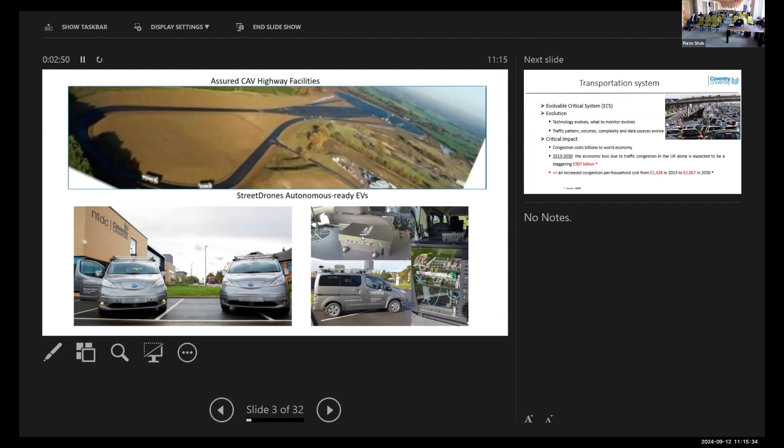We have also two street-drone Nissan autonomous electric vehicles equipped with communication capability through Cohda wireless OBU with a range of LiDAR, radar, and also 360-degree camera. So we can see the whole environment, and we can also communicate between the two cars to coordinate different maneuvers on the road. These are the main equipment and facilities we are using in our research.

Obviously, when we talk about transportation systems or mobility systems, we usually refer to this system as an evolvable critical system. Evolvable because the technology we use to monitor traffic and to measure the traffic flow evolves continuously. The technology we had 10 years ago is completely different than the technology we are currently using on roads, like the various types of sensors, and also the cars now can provide certain input that could help the traffic authority to better control traffic and mitigate the creation of bottlenecks.

Also, it is critical due to the critical impact of traffic congestion on the economy, on the environment, and on the individuals as well. According to INRIX, the cost that every household will pay in 2030 is corresponding to almost £2,000 per year, which is an increase by almost 45% compared to the cost of congestion in 2013, which means that it is a significant negative impact that we need to try to reduce or avoid.

Here I will share with you an example of the traffic vision of Transport for Greater Manchester. According to the statistics they collected, they expect that the region of Greater Manchester will witness significant economic growth. Therefore, it will become an attractive destination for many people looking for better opportunities. And this will translate in 2035 to around 1,600,000 additional trips per day, which will be using the road infrastructure, which is already deteriorated.

So let's start by talking about the autonomous vehicle, which is the cornerstone of this concept of mobility as a service. So simply, an autonomous vehicle is a car equipped with a myriad of radars, lidars, cameras and other types of sensors. It is able to localize itself, sense the environment, either directly using these radars or through some information shared with other road users. Then it will build a perception through internal sensors and also through fusing the information they gather from the environment. Then it will take action, which will be translated into movement. So this, as it looks here, looks like an ideal car that could have significant positive impact on the road.

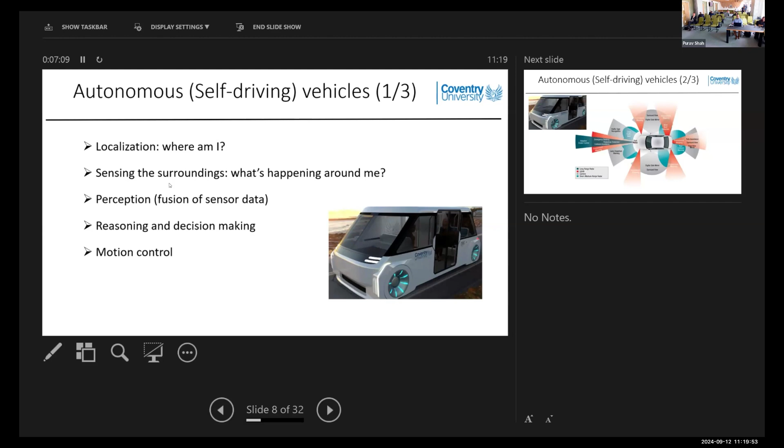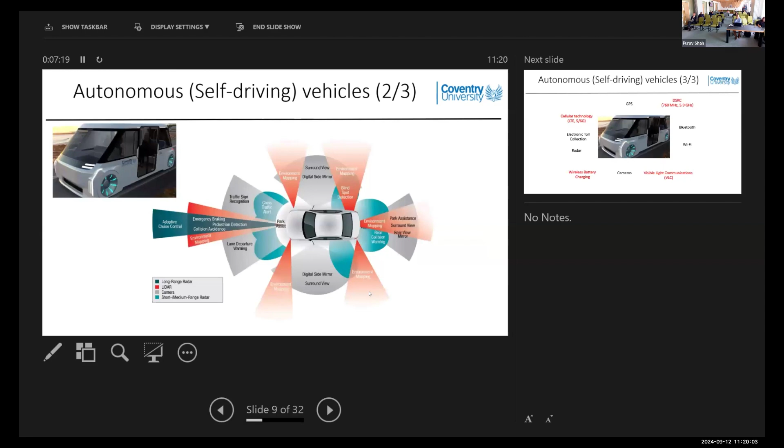Obviously, we have here a number of radars and lidars, etc. Each of them is dedicated to a specific feature that will support this car. We have also different communication technologies. As Simon has already mentioned, we have DSRC, we have cellular V2X, we have visible light communication, we have different frequency bands. In Japan, for example, they use 760 megahertz, in Europe and the US 5.9 gigahertz, and now we are moving towards millimeter wave for vehicular communication.

We have also this fascinating feature of wireless battery charging. So this is a very important feature, especially if we are looking at sustainable mobility. It will enable high penetration of electric cars or electric vehicles in general, but at the same time, it requires significant investment. We need to modernize our road infrastructure to include the infrastructure required for those cars to recharge on the move, or even for the cars to share energy between each other.

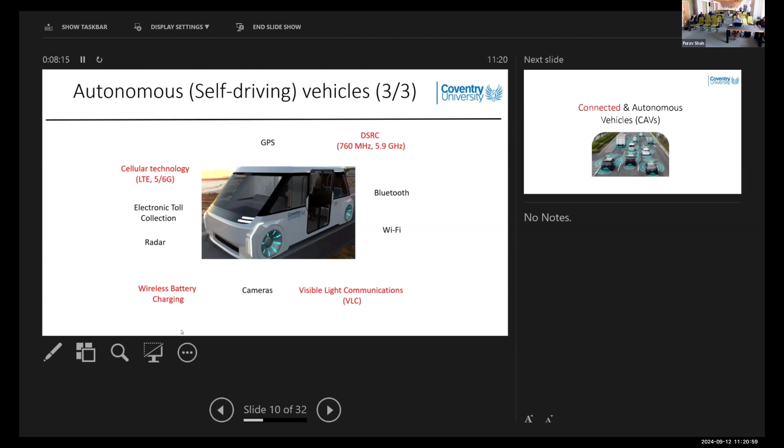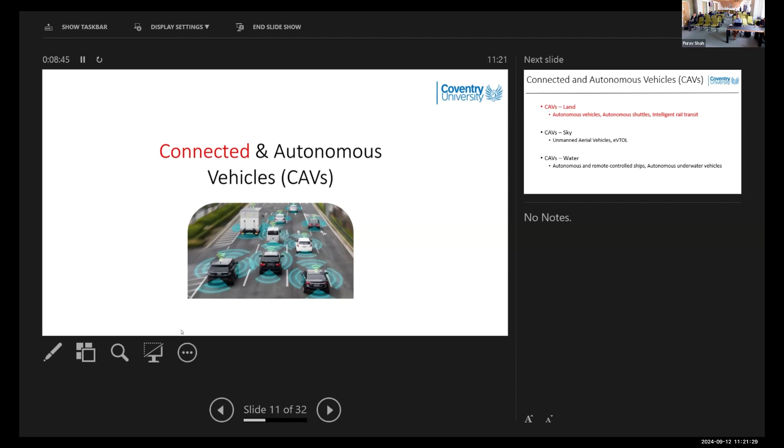So then what are connected autonomous vehicles? Simply an autonomous vehicle with a new sensor input. This new sensor input is the new information shared from other road users, including cars, including the infrastructure, and so on. Which means when we make decisions, instead of just relying on the input we have ourselves, we also extend that knowledge by getting some wider or extended perception from other neighboring vehicles.

So obviously we have cars on land, which are autonomous vehicles, autonomous shuttles, intelligent rail transit. We have cars in the sky as well, when we talk about drones or eVTOL, which is an emerging transport means, which means the taxi drones. And also we have cars on water, like autonomous and remote control ships or autonomous underwater vehicles. So here in this presentation, we just focus on cars on land.

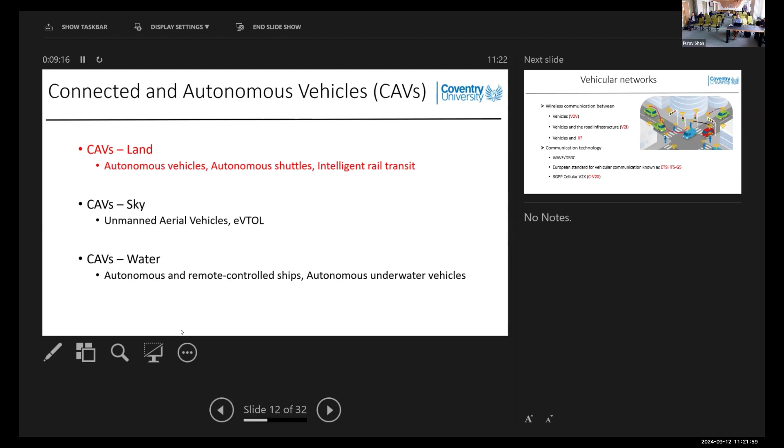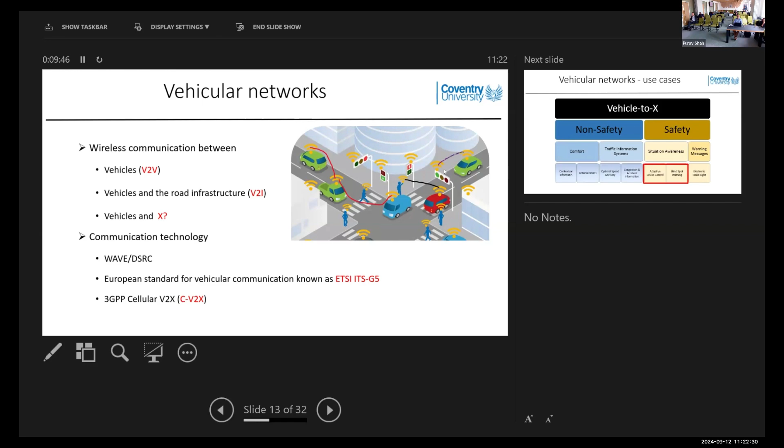So in this context, with vehicle networks, we have a myriad of use cases. Mainly, we are concerned with the safety ones, which are the more important ones. Examples like adaptive cruise control, blind spot warning, etc. So this information shared between vehicles requires ultra-reliable communication with low delay constraints, and also the communication should be fully secure as well.

So the potential benefits of this technology, connected and autonomous vehicles: it may lead to significant enhancement in driving safety. It can also significantly shorten trip times and provide drivers and passengers with more comfortable journeys. It will help to significantly decrease CO2 emissions and therefore achieve sustainable mobility, and also could improve ITS service efficiency by providing or putting their resources as a service to other potential users.

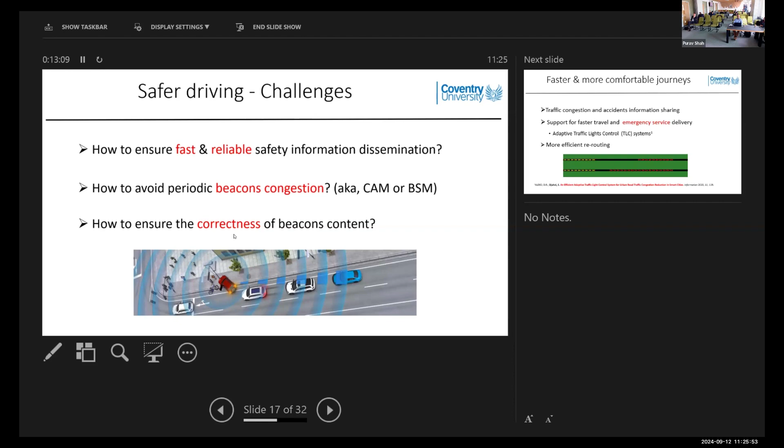The other problem as well is the potential of cyber threats. The content of the beacon needs to be accurate and correct. So if one car is compromised, it might start broadcasting manipulated data that may lead to confusion. And if this car, for example, is part of a platoon, it may also lead to accidents or simply disturb the traffic flow. So mechanisms need to be there to give assurance to the receiver that this data is accurate and represents the current situation.

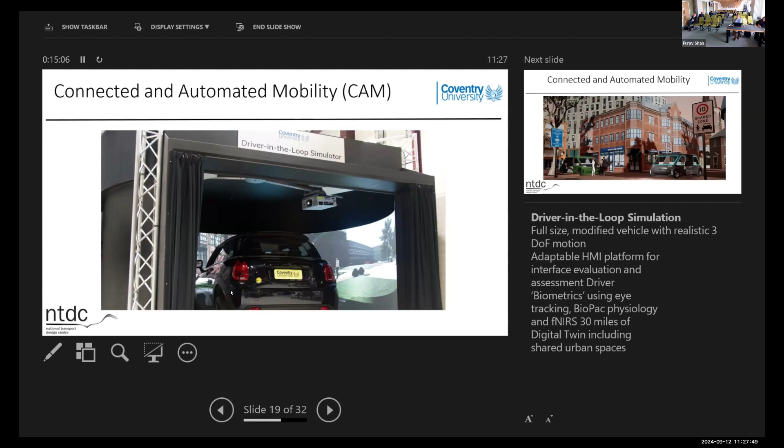So here also another example of connected and automated mobility. This is a driver-in-the-loop simulator we have in our National Transport Design Centre. This is a modified vehicle integrated with a 3D environment. So here, for example, we test how potential drivers or passengers would react to future transport means. We could create a virtual environment like the one you can see here. We have automated shuttles and pedestrians sharing the same road space, and we want to study how this will affect both the safety of the pedestrians and the level of comfort of the passengers and drivers of those vehicles.

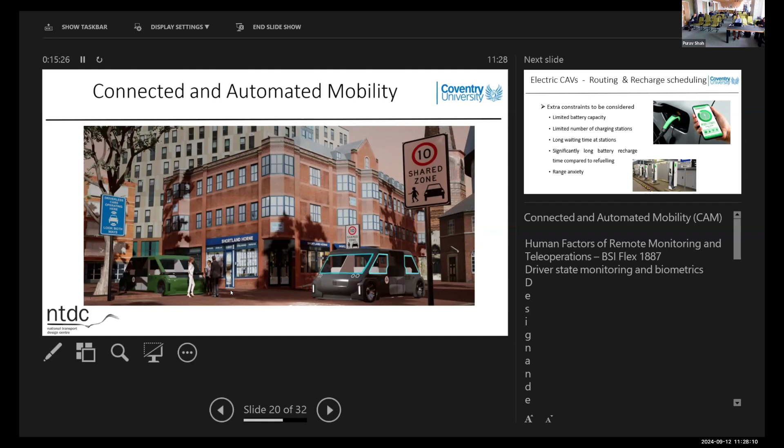So another topic we address in our research center is transport electrification, and currently within one project we are looking at routing and recharge scheduling for electric cars, which means in case there is any event on the road, we need to calculate the best detour. For conventional vehicles, you look to minimize the time or distance. For electric vehicles, we have a number of extra constraints to take on board: the limited battery capacity, the number of charging stations available, the type of charging station in terms of speed, sometimes also the energy type, whether it is renewable or not, the price, and also how long you need to recharge the battery to a level that enables you to get to your destination.

And on top of that, we have range anxiety, which is probably the main obstacle that prevents many people from buying electric vehicles. So all these need to be addressed in order to increase the public acceptance of electric vehicles, which are one of the main building blocks for sustainable mobility.

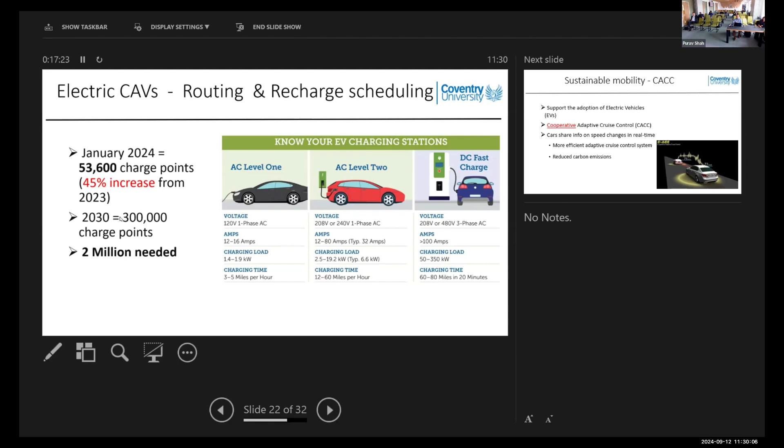So here are a few statistics about the different types of charging points available in England. According to the Department for Transport, in January 2024, we have 53,000 charging points of different categories. And based on the prediction of the expected increase of electric vehicles on the road, we need 2 million charge points by 2030. While according to this rate of increase, we will have only 300,000, which means on top of the deployment of charge points, we also need certain solutions that will enable smooth integration of electric vehicles in

road traffic. So we also have cooperative adaptive cruise control, which is one of the interesting features that will enable more sustainable mobility, where the cars share their intention in advance to coordinate acceleration and deceleration. And this is very important mainly for trucks, because when trucks brake, they generate a lot of CO2 emission. So it is very important that their acceleration and deceleration be smooth.

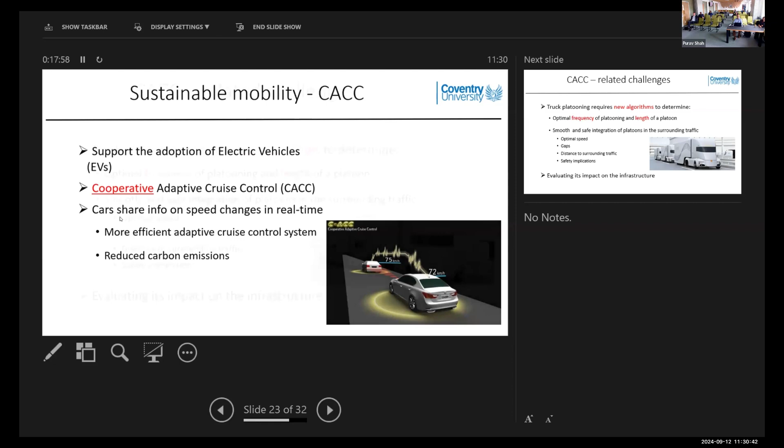So here, for example, if we imagine that we have a platoon of autonomous trucks on the motorway, to ensure that this platooning feature will have a positive impact on traffic flow on the motorway, we need to analyze first what should be the frequency of the platooning, what is the ideal length of a platoon of trucks, what is the optimal speed, the optimal gaps between the trucks, and also the distance to surrounding traffic, because we don't want to have a platoon of trucks that will create safety implications for other road users.

Imagine, for example, that you are driving your car and you have a platoon of trucks on the left lane and you want to exit. They are blocking your way. So you miss that junction and then probably you start accelerating, or you may take certain actions that will put your life in danger.

So here, for example, is a recent solution we developed in our lab about how to use EVs in order to reduce traffic congestion. This solution is inspired by wireless networks. Those who work in wireless networks know that we have cognitive radio technology, which means if your frequency band is overloaded, you can scan other neighboring frequency bands, and whenever you find that they are underutilized, you can use them for a given period. Whenever you detect that the primary users are back, you just jump back. This is what we did here.

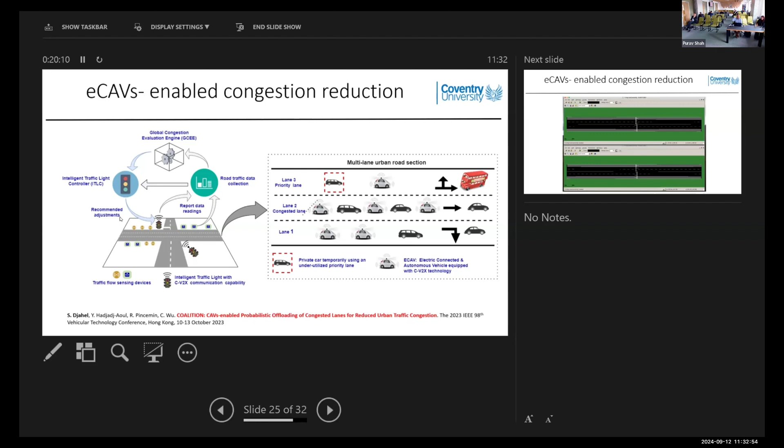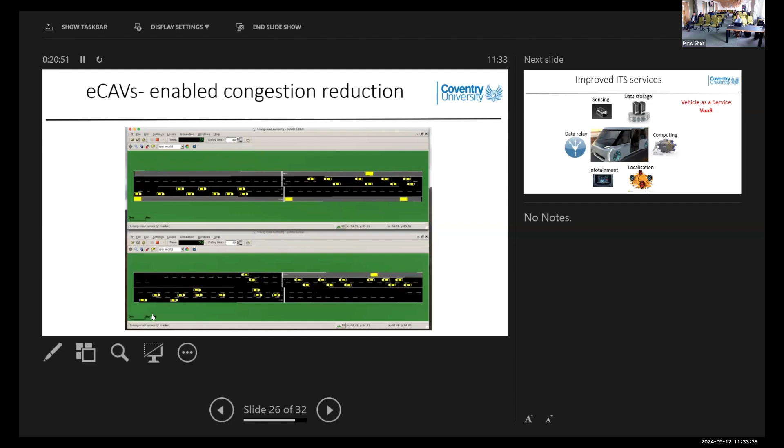And this is how it looks. Here on the upper window, we have just normal traffic. There is no modification. The one on the bottom has the modification with our scheme. And you see here the bus lane: whenever it is gray, it means it is only for buses because there is a bus on that lane. Whenever it is underutilized, some vehicles are allowed to jump and use it, and then it becomes black. And this enables the traffic to move quicker than in the upper window.

And here, obviously, we give priority to electric cars because we want mobility to be more sustainable, so that we encourage more people to buy electric vehicles. That's the idea behind the solution.

So besides these features that enhance safety and make travel faster and more comfortable, there is also potential for connected autonomous vehicles to become service providers, which means the car could provide certain resources or features to other road users and third parties as a service. For example, the car has the GPU, has data storage capability, has sensing capability, and could also play the role of data relay or data forwarder.

So the idea here is that we're thinking about the car itself as an Airbnb-like service provider, which means whenever certain resources are underutilized, the car could provide those resources to other cars, to pedestrians using their mobile phones, or to drones, for example. We could imagine that drones are dispatched for monitoring traffic.

They could land on the roof of the car, which is equipped with charging capability, recharge their battery, or they can recharge their battery wirelessly to minimize the need to go back to the control center, recharge, and back to the mission again. So here the idea is that we could imagine that we have mobile computing on the wheels, where a platoon of cars can provide certain computing resources to run other tasks.

The key challenge to have this as a realistic mobile cloud platform is the rapid mobility of the cars and also the highly variable availability of those computing resources. Because the car also needs those computing resources and storage resources for its own services, and probably for certain services provided to their passengers as well. So this variability is very difficult to predict.

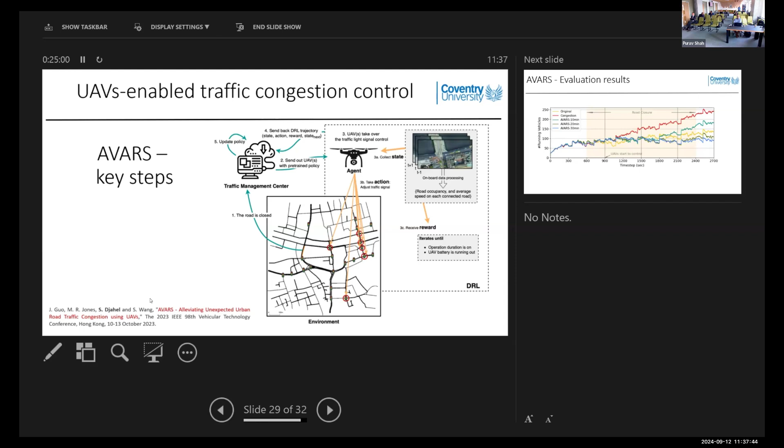They could just use computer vision techniques to analyze the pictures and probably the videos to get an accurate estimation of traffic flow, etc. And the idea then, the drones will decide about the timing of different traffic lights, green, red, etc. And then we deploy deep reinforcement learning so that we can improve the efficiency of the model run by the UAV over time. And here are the simulation results we have obtained, just to explain here.

So here what we did, we ran a simulation for 2,700 seconds. We created an accident at 600 seconds. And then we let the congestion build for 300 seconds. And then we dispatched the drones to start controlling the junctions. So we ran the drones for 10 minutes, 20 minutes, and 30 minutes.

And here you can see at the end, this is the congestion state. So we have a road closed due to an accident, and then the congestion starts to build up. This is without any intervention from traffic lights or drones. This is the original scenario. And here, when we apply our technique for different periods of time, 10 minutes, 20, and 30 minutes.

You can see for 30 minutes, we almost reduced the congestion by half, which means the traffic light timing decided by the deep reinforcement learning model run by the swarm of drones was very efficient in dealing with this unpredictable traffic congestion on the road, even if traffic light controllers have failed or are under attack.

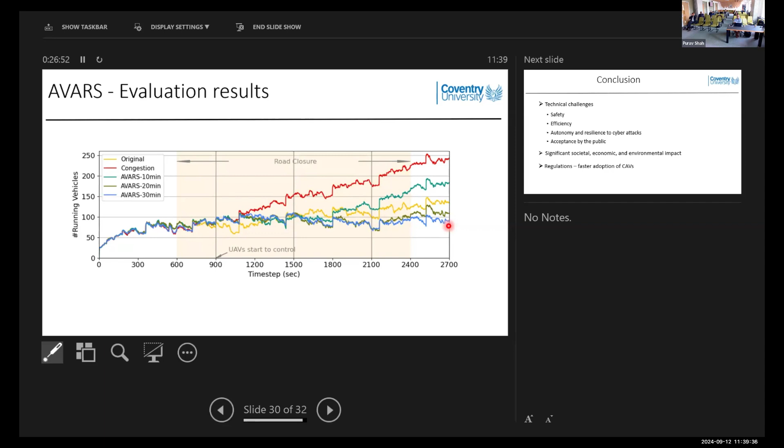So now, just to conclude, as Simon said, we believe that this technology of connected autonomous vehicles is a very promising technology. So in order to take advantage of it and increase its penetration rate in the future, obviously we need to have the regulation in place, and we won't have the regulation in place unless there is evidence about the benefit of this technology and also the safety, that this technology could be integrated into conventional car traffic

safely with high efficiency, will be resilient to cyber attacks, and also needs to be accepted by the public. So all these are challenges that need to be overcome. We expect that if this technology is adopted widely, it will have significant societal, economic, and environmental impact.